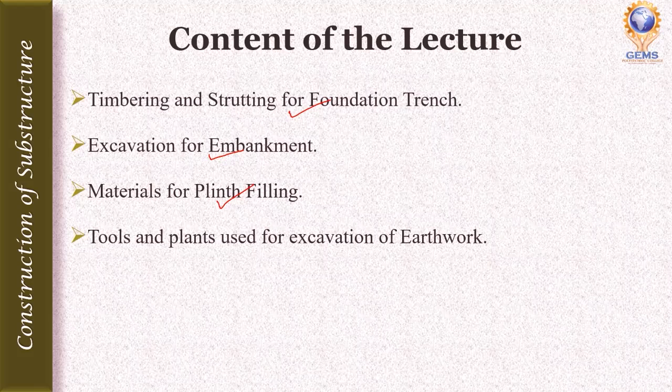So let's start where we left. The third method in timbering and strutting for foundation trenches is vertical sheeting. This vertical sheeting is adopted for deep trenches up to 10 meters in depth in soft ground.

This method is similar to the box sheeting, except the excavation is carried out in stages. At the end of each stage, an offset is provided so that the width of the trench goes on decreasing as the depth increases. See here, this width decreases when depth increases.

Each stage is limited to about 3 meters in height, and offset can vary from 25 to 50 centimeters per stage. So the height will be 3 meters, and the offset will be 25 to 50 centimeters. So here the same height will come, 3 meter depth.

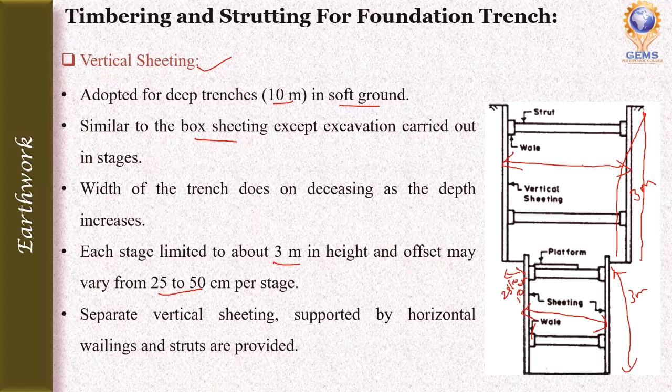For each stage, separate vertical sheeting supported by horizontal wailings and struts are provided to keep them in position, so that the sides of the trenches remain stable. So this is the vertical sheeting.

The next method is the runner system. This runner system is used in extremely loose and soft ground. This extremely loose and soft ground needs immediate support as excavation progresses, so it cannot withstand once the excavation is started. So we need support to withstand the sides of the trenches.

The system is similar to the vertical sheeting of box system, except that in place of vertical sheeting, the runners are made of long wooden sheets or planks with an iron shoe at the ends. So this is same as the vertical sheeting, but at the end we will have an iron shoe. That's the difference. The wales and struts are provided as usual in the vertical system.

These runners are driven up to 30 centimeters in advance of the work by hammering. So we have to insert at least 30 centimeters before we are going to excavate. Where we are going to excavate, we have to insert in advance. This is the runner system.

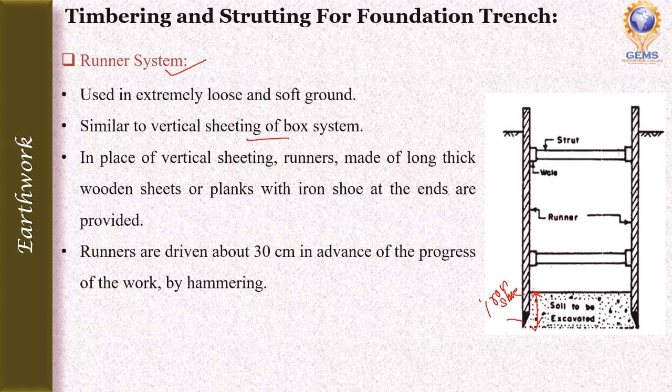The last method is sheet piling. As you've seen in the diagram, these sheets are first inserted into the soil up to the desired depth. Then we will remove the soil from the ground, so the sides will be supported and it won't fall against the trenches.

This method is adopted as follows: when the soil to be excavated is soft or loose, and the depth of the excavation is large, and when the width of the trench is large, and when subsoil water is present, we will use sheet piles. These sheet piles are used to resist the lateral earth pressure, and these are driven into the ground by mechanical means.

So here we are using a mechanical machine to drive this sheet. It can be driven mechanically into the ground, and this sheet piling can also be used for excavating very large areas and very large depths. So these are the methods used in timbering and strutting.

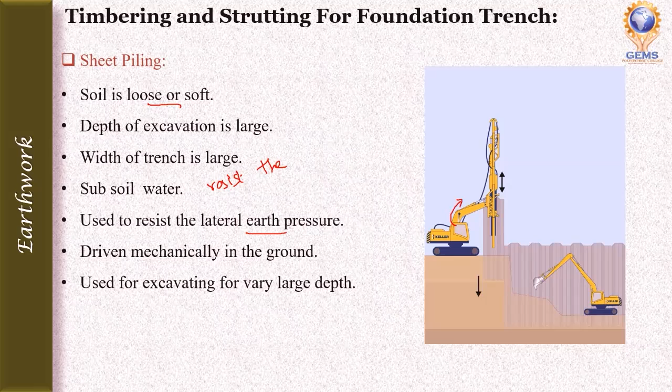Next, we will see the earthwork for embankment. An embankment, as you see in the diagrams, is a thick wall of earth. See here, these are all embankments. It is a thick wall of earth that is built to carry roadways or railways over an area of low ground, or we can use this embankment to prevent water from a river or the sea from flooding the area.

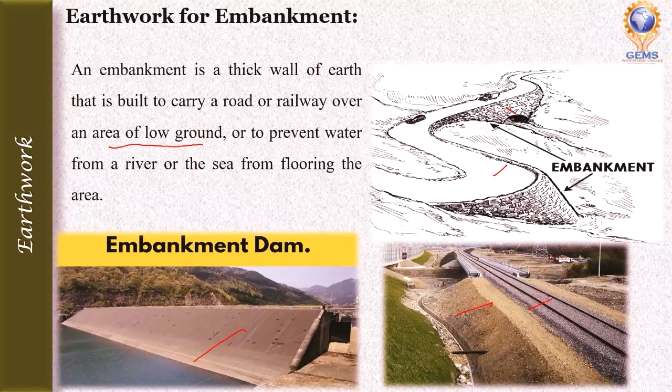How we can do the embankment: first we have to cut and remove the earth from the borrow pit. Borrow pit means we cannot get the soil from this area, so we get it from some other place. If you are getting the soil from another area, that is called a borrow pit — we are borrowing soil from that area. So we are cutting and removing the earth from the borrow pit, transporting it to this area, and placing the soil in a fill in the form of an embankment. This is the process of how we can do it.

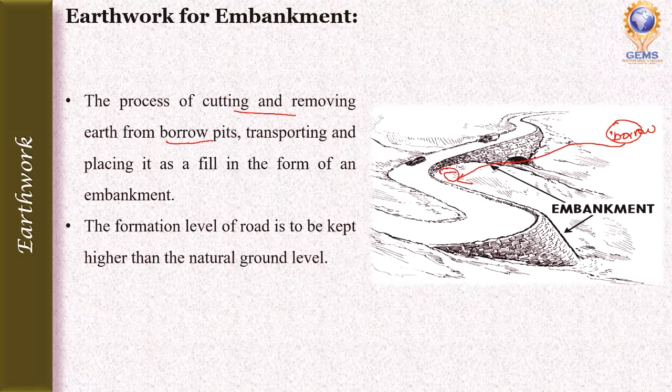When the formation level of a road is to be kept higher than the natural ground level, we can also use the same embankment. The earthwork in embankment is carried out in the following steps: the first one is making the profile of the embankment.

That means we have to keep the job profile, where we are going to excavate or where we are going to fill it, marked on the ground. That is making the profile of embankment. The profiles of the embankment are constructed with poles and strings. This is poles and this is strings. By using it, we will take the levels and markings on the ground.

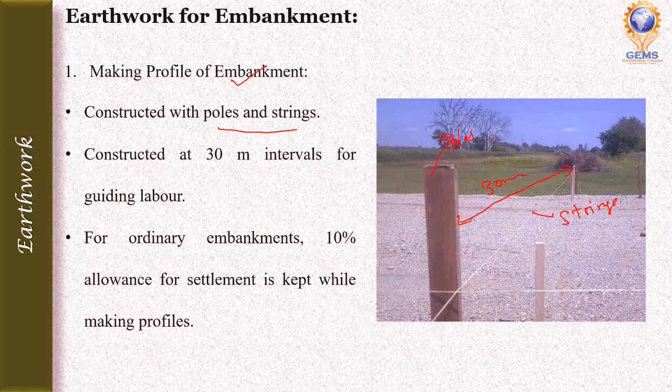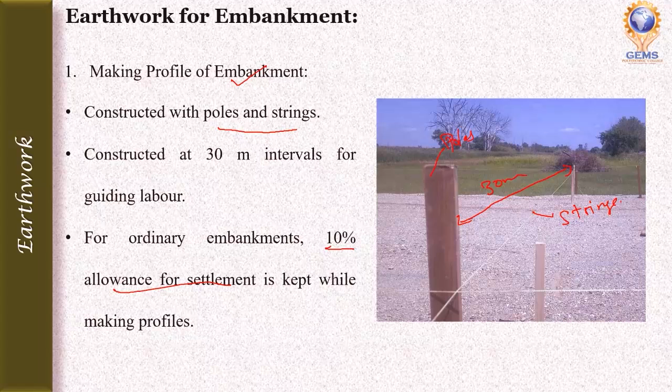These are constructed at 30-meter intervals for guiding labors, so the distance between two poles is 30 meters. If you are taking for ordinary embankment, 10% allowance for settlement is kept while making profiles. So this is making the profile of embankment.

Next is stripping and storing of topsoil. Once the markings are done, according to the marking, we have to remove the topsoil. That is called stripping. So the topsoil of the site is stripped to the specified depth and stored at a suitable location. So this is the stripping and storing of the topsoil.

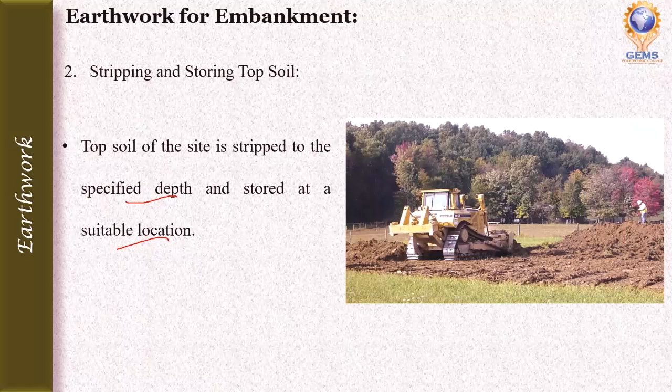Layer by layer, we have to start the filling of the sand. That layer size should not exceed 250 mm, and we have to compact every layer with the same compact rollers.

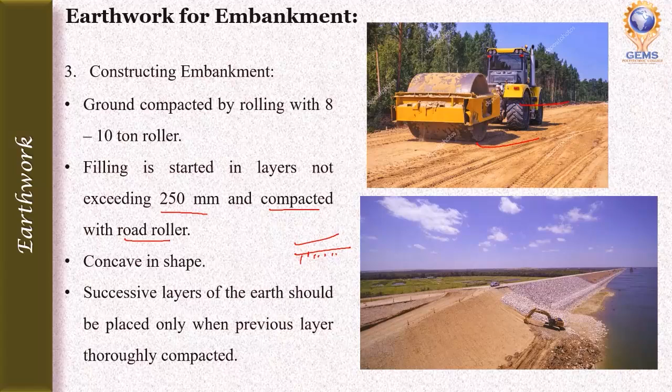These layers are kept slightly concave in shape. The successive layer of earth should be placed only when the previous layer is thoroughly compacted. So once this layer is thoroughly compacted, then only we will use another layer. So this is the process of earthwork in embankment and how we are constructing it.

Why? Because to avoid uneven settlement. So if it is black cotton soil, we have to remove it to avoid uneven settlement. In the process of plinth filling, watering and compaction should be carried out till the required level is reached, so as to form a thoroughly compacted base.

The material for the plinth filling consists of hard murum and broken rubbles. These are the materials used for plinth filling. On the compacted or consolidated plinth filling surface, once it is compacted to the leveled surface, a concrete bed of thickness 80 mm is done for laying the tile work. So this is the material for plinth filling and how we do the plinth filling.

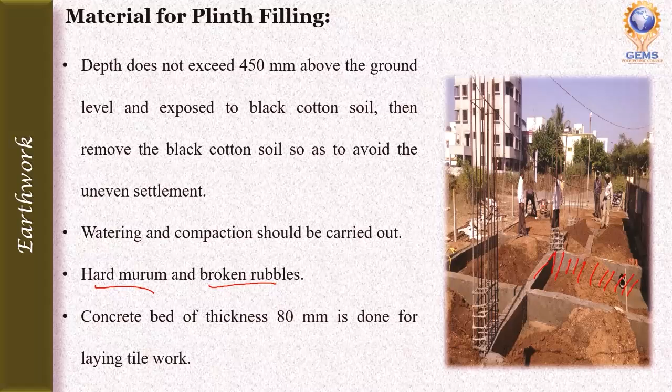Next is, what are the tools and plants used for excavation of earthwork? If you are going to do it for a small building, excavating by hand, we need pickaxes, spade, kassi, hammer, rammer, line and pins to mark on the ground, and an iron pan to carry the soil. These are the equipment needed if doing excavation by hand.

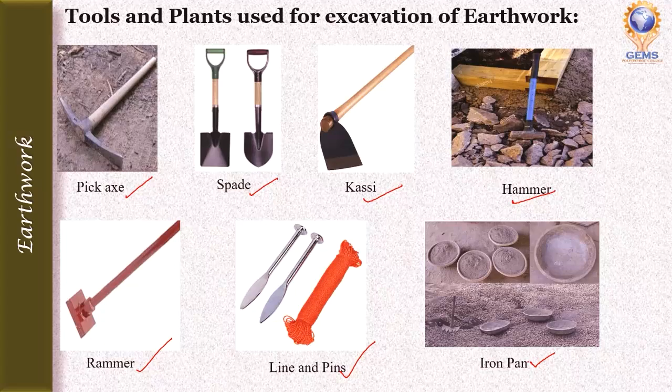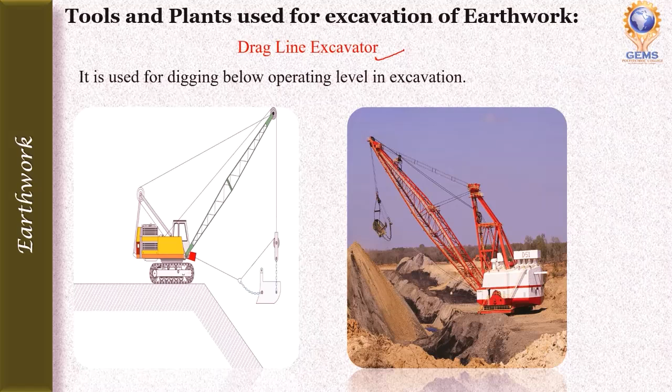If you are going to do excavation for a larger depth, then we need mechanical movers. The first excavator is dragline excavator. This dragline excavator, as shown in the figure, is used for digging below operating level in the excavation. So if you cannot operate below a certain level, we can use the dragline excavator to excavate it.

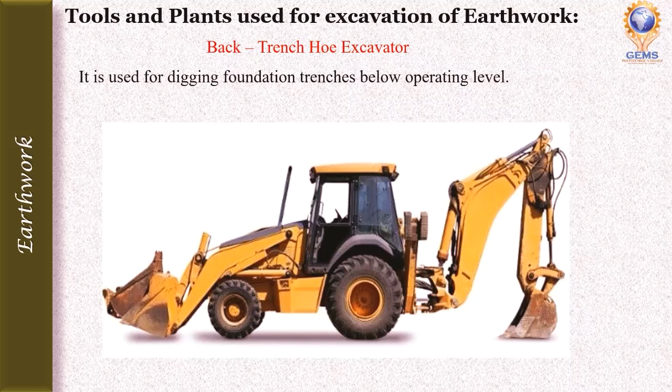The next is back trench hoe excavator. We see this machinery nowadays, and we call it a JCB. This is used for digging foundation trenches below the operating level. The last one is skimmer excavator. This skimmer excavator is used for surface excavation and leveling.

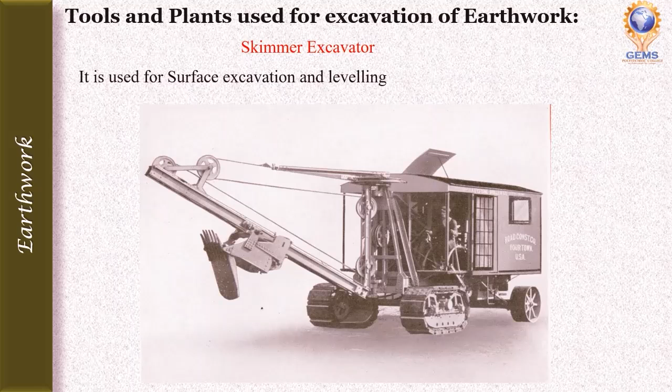So these are the tools and plants used for excavation of earthwork. By this, we completed our earthwork portion in unit number 2. So in the earthwork portion, we started with earthwork and excavation of the foundation, the methods of timbering and strutting for foundation trenches, the earthwork for embankments, materials used for plinth filling, and tools and plants used for excavation. Thank you.